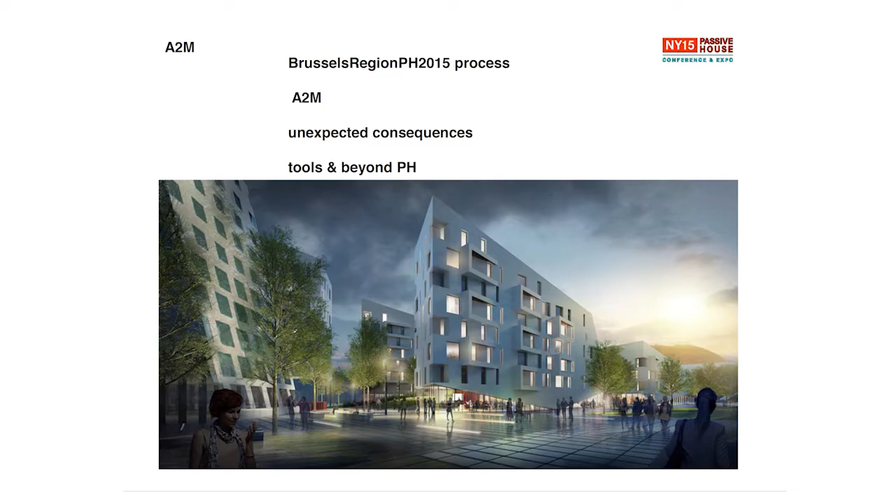I'm also teaching at university, so I'm going to show you some examples that the poor students have to live with. What I'm going to explain to you is how, briefly, in a region in our country, the main region, we achieved passive house now. It has become a mandatory law.

So since the beginning of this year, if you want to have a building permit, no matter if it is a new build or renovation, no matter the destination, you have to fulfill passive house. So if you don't want to do passive house, no problem, but then you have to leave the country. But it's okay. You will see how it happened, because it was an accident. It shouldn't have happened, but it happened.

And then how do we live in such a context as architects, because it's now normal. And then we are going to show you some unexpected consequences, some very, very cool. And also now that all is going to passive house, what's next? What are we doing now as architects? How can we redefine architecture?

And all that is environment and urbanism is regional. So we have a government, a president, and ministers, and they decide what to do locally. We don't have to follow a federal government. For construction, because I'm going to come back a few times on cost, our average construction or renovation cost is quite the same. It's 150 plus or minus dollars per square foot. If I compare with data I found on the internet, we have the same prices as in Arizona or something like that. So we are quite far from New York City.

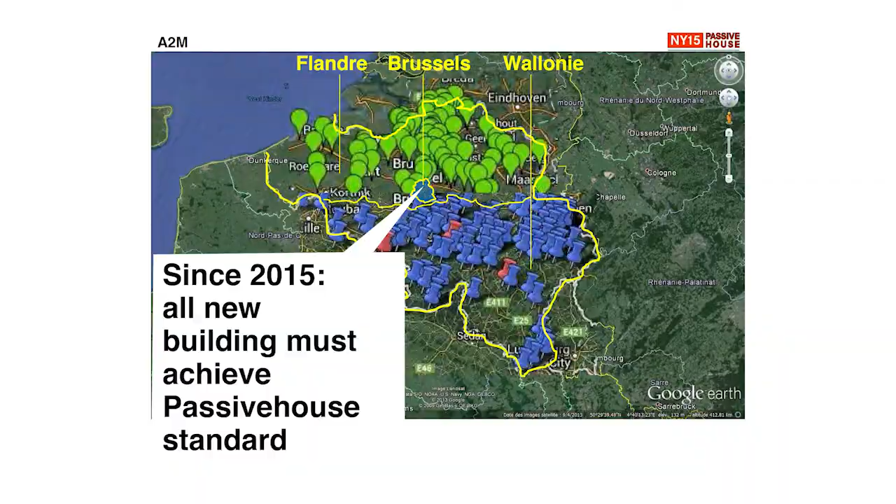Okay, this is our whole country, and the Brussels region is here in the middle. These are all certified passive houses from our local passive house platform. The law was voted by the government unanimously. We always have coalitions. It may look weird to you, but we mix all the parties. But the whole coalition voted the law of mandatory passive house, in 2011.

And one of the reasons they could vote that law, I shouldn't say that, of course, but it's thanks to ignorance, because they didn't know what we were talking about. Otherwise, no way they would have voted such a law. Of course not. But nevertheless, we achieved that. So here we see the president, the ministers are here, and one of the ministers, she's quite a nice woman, she's a friend now, she proposed that law and said, okay, why don't we go for mandatory?

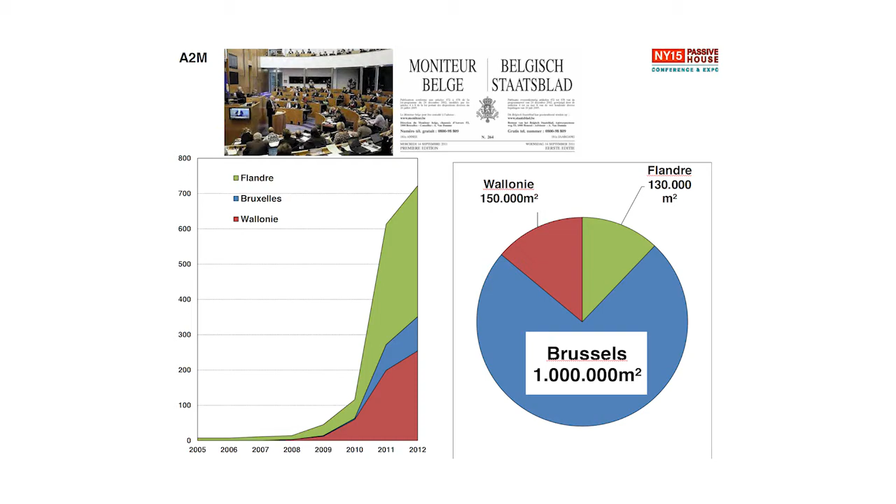But before doing that, they had a lot of questions at the parliament and so on. Is it possible? Did you make a feasibility study? Are you sure that we have the skill? Are architects able to do it? Contractors, whatever? And what's the extra cost, you know? And what they could always answer is we have done no feasibility study, no university study, nothing.

We just looked at our local stock of passive house buildings growing, and they just saw what we can learn from what people are doing now. So this is one of the key elements to achieve that policy: first they started to push the local stock of passive house. And I'm going to show you one of the actions they've done. And they had amazing success, because in only 4 or 5 years, we achieved 1 million square meters, that's 10 million square feet.

So the region we have here in blue, that's that policy, when they pushed passive house buildings. And the 2 other regions, which are bigger than our region, had another policy. It was, well, don't push too far, don't go too far, just give some help for putting in some solar panels, but just gadgets, okay. So we saw after a few years that it's not such a good policy, of course.

But having a third of the country go to Passive House is quite something. Of course, it's our scale, it's not as big as your scale. And the effect was immediately amazing. So we did a survey 2 years ago. It's been just adapted now, not only thanks to Passive House, but it's a general policy for renovation of the buildings, because it's also almost 70% of CO2 emission.

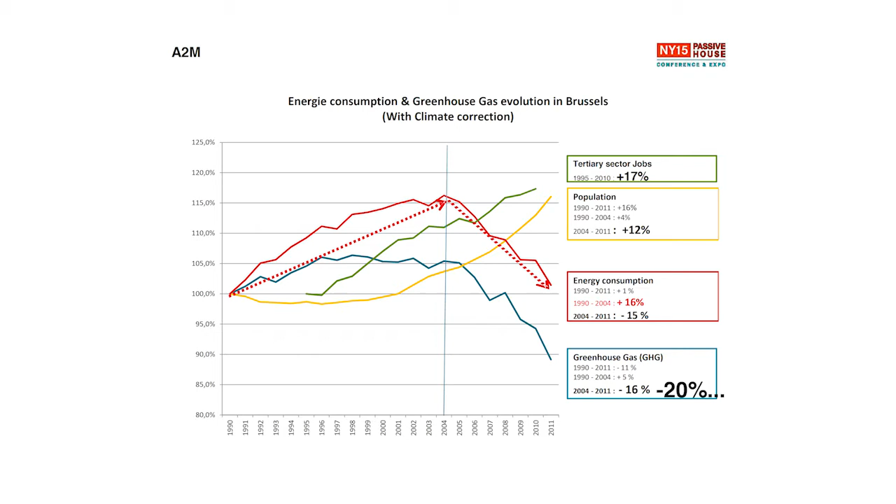We have already a drop of 20% CO2 emission compared to 1992. Not compared to 2010, as the G7 proposed last Monday, but it's already okay. So we were surprised. So it's possible to do it. Despite an increase of population, this is the growth of jobs thanks to these policies. So it was a surprise, not only for us, but also for the government.

So how did we get there? One of the actions they've done had an amazingly big effect with almost nothing to invest. It's what they call exemplary buildings. So the region, like, you would say, New York State proposes: who wants to have $110 per square meter, and I give you that, but you're going to have maximum $225,000. So if I ask you, would you like to have that? Everyone would say, of course, I want that money. But to have that money, you just have to go as far as you can. You don't have to fulfill Passive House, but just do what you can, and we will see.

So the first year, when they launched that program, they received a bit less than 100 proposals. And in those 100, we proposed a lot of projects. We forced our clients. A third of these projects were Passive House. That was in 2007. And year after year, during the crisis, 2008 and 2009, every year they were coming back. Who wants to have maximum $200 and something thousand? And the more the crisis was there, the more people were coming. Of course, I want that money.

But what happened? The second year, when they launched that policy, people looked back at last year: who was the winner? What did they do to have that money? And they said, oh, they did Passive House? Okay, now I'm going to do it, because if my neighbor had it, I want to have it also. And what was clever is when they proposed that, it was no matter the destination. You could be a private, a municipality, schools, a kindergarten, or a developer, a bank, whatever.

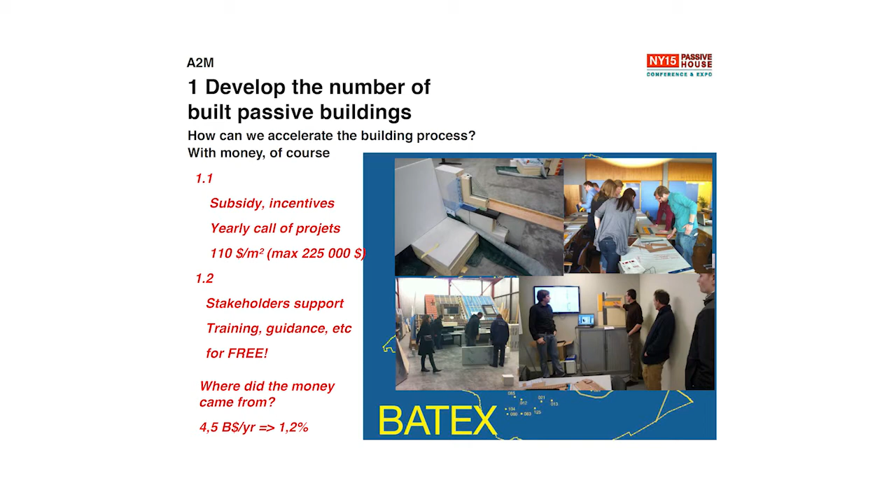But after doing that for 4 or 5 years, so from 2007 until 2011, we had already a local stock of a lot of kinds of destination buildings, retrofitting and so on, all Passive House, no EnerPHit, but 100% Passive House.

And there was already a lot of feedback. For example, one project out of two has a cost which is cheaper in Passive House than a normal building. That's not normal. And for architectural design, there could be very crazy forms and so on. So it was a surprise.

So of course, the parliament asked: but normally Passive House should be an extra cost of 10, 20%. And then the minister said, yes, you're right, but here, look, in our local stock, look what we have. Half of them are done with a lower price than classical, etc., etc. But of course, when the law was voted, because no one understood anything, it was published. We have a king, so it's a king's law, whatever, okay?

But after, all the lobbies, all the stakeholders, real estate, contractors, Code Institute, architects, federation, engineers, they all went crazy. When I say crazy, my God, it was like war. So they all came back to the minister. You're crazy. There's going to be a strike on the street. We are in a deep crisis. Then we're going to abandon your country. And then the minister: okay, you want to abandon? Ciao. Well, she was, my God. I also thought she was crazy, but okay.

But it worked. What happened in 2011 when they received all the complaints and everything, we proposed to all the stakeholders: okay, look, we have 4 years before the law starts. What should we increase? Where should we work together? So we set up hundreds of trainings, support and help sector by sector for real estate developers, plumbing companies, craftsmen, all together. And that helps. And at the end of 1 year of hard discussion, I can tell you, we all signed together what we called the Passive House 2015 Pact.

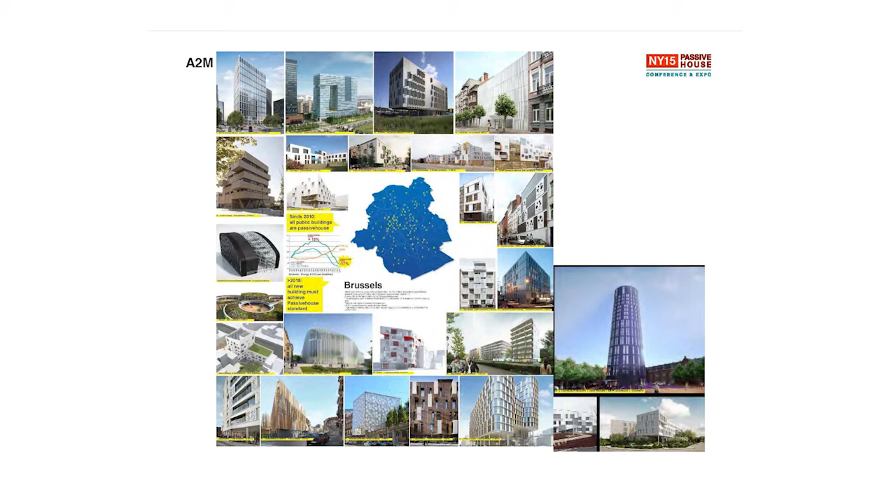And it had an enormous effect, those exemplary buildings, because we saw all kinds of projects arriving with any kind of design, but all fulfilling Passive House just to get that incentive. Now, of course, because it's the law, Passive House is normal now, so they could stop all the incentives, and this money now goes to social.

That's not bad. But what is a good sign is that the government itself, for their own building, the environmental administration, their own building is also a Passive House. It doesn't look like a Passive House, but okay, it's Passive House. Even the energy provider, his own headquarters is Passive House. Of course, he's not stupid.

But what happened last year, in September, we had a new election, a new government, a new coalition. Of course, the former minister, she's fantastic, but she was not re-elected. There's a new one. Thomas, you met her. She's okay, the new one. She understands nothing, but she accepted. And they said, okay, we're going to keep the law. We don't change it. We will see.

And what happened during the few months before the 1st of January this year: all the lobbies went back, even the ones who signed the pact, of course. What do you think? So they came back and said, oh, Madame la Ministre, you should remove the law. It's going to be hell, etc., etc. So it was crazy, forget it, I don't know what.

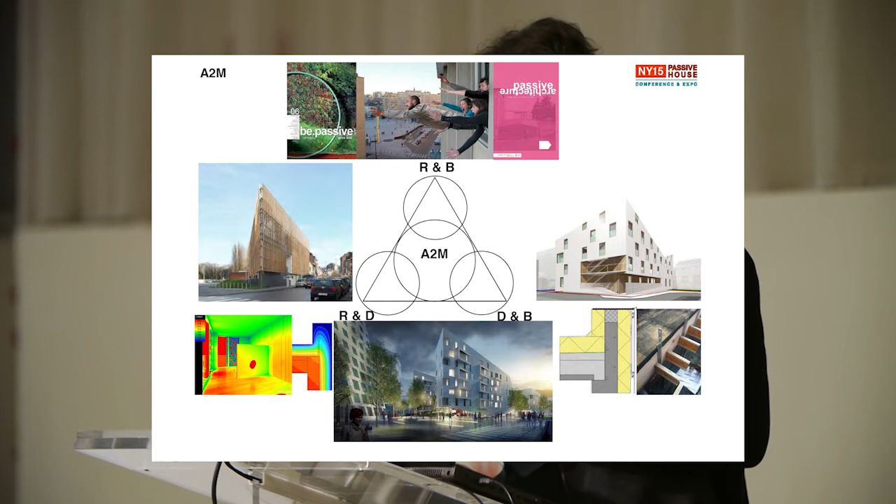But we have put a lot of effort, while I was also president of the Passive House platform, into communication. So we did a lot just for free, for fun, of course. So we set up that magazine. It's called Be Passive. It was given to all architects. It's a quarterly magazine. We stopped in September. Now we launch a book that explains all that. So Ken has some copies of that book, French, English, and Flemish, always 3 languages. Crazy. So now we do communication in our company ourselves, magazines, all that.

Research and development was done in the Passive House platforms. Now we reintegrated that, and I'm going to come back to that. So now we build not only in Belgium, but we're doing the Belgian embassy. It's a crazy story. In Central Africa, it's in Congo. Of course, Passive House. In Côte d'Ivoire, we have another condominium. And very recently, there is a project here in Meatpacking, and maybe a second in Newark, we will see. But apart from that, we do a lot of conferences, training, masterclasses, even in Shanghai, on Passive House.

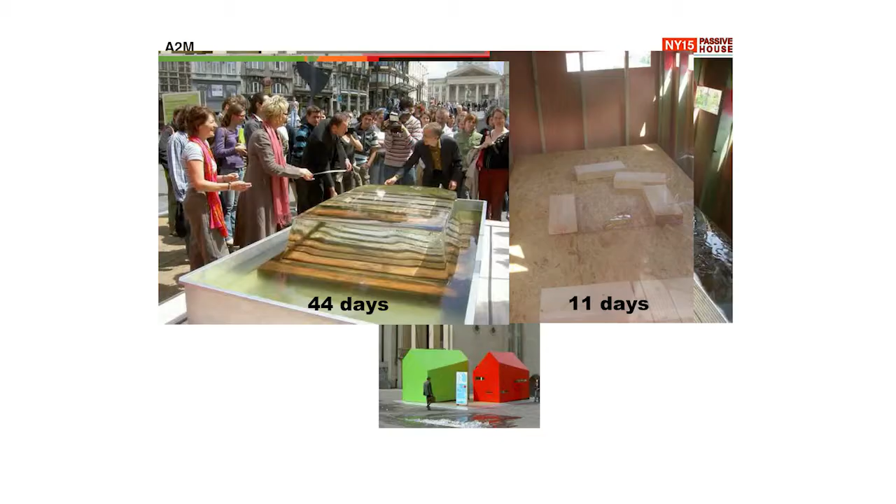What we discovered was a surprise even for us - it worked, half the ice was still there. So you see, insulation works. People received it well, so it was working.

The year after, we did it again but in winter, with heating inside, and people could see live how much energy you are saving or not.

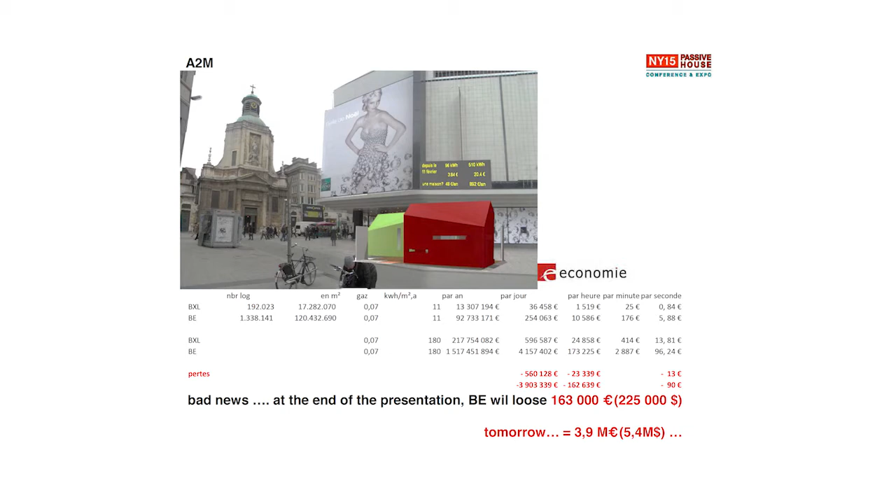What's funny is, regarding that calculation, in the hour when I'll be finished, my country is going to lose about $225,000 because the buildings are not Passive House.

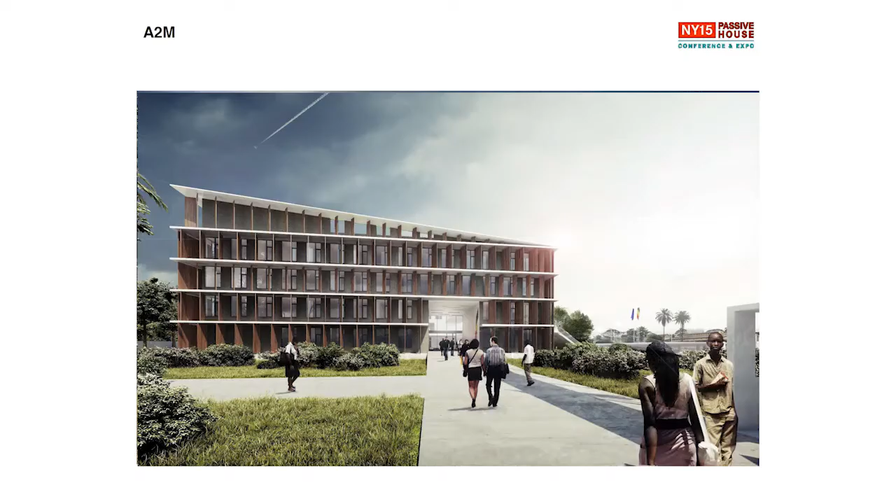So we won a competition for the Belgian embassy in Congo, Kinshasa. But it was trickier to make bulletproof, Kalashnikov-resistant buildings than passive house ones. Now it's under construction, so we're insulating it and everything.

We proposed to the government: look, you should do a passive house even in a tropical country, because if I take the Köppen climate classification, Belgium - I don't know why - has a small concession in South Antarctica, which is also a polar station, a passive house polar station, one of the coldest places on Earth.

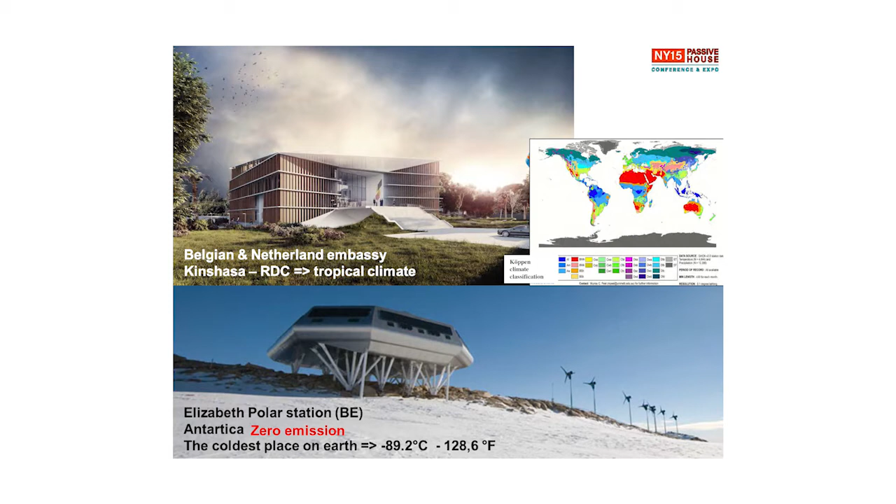So we told the government, look, if we already have a passive house in the coldest place on Earth, let's do it in the hot climate too, which is not only hot but also has mainly 100% air humidity.

But that's not why we won, of course - it's because of the price again. This project, as I said, is under construction for a cost of about $12 million.

What was a surprise - so this is us, this is the passive house. There were other companies, other competitors, who proposed normal buildings or low energy buildings for $25 million, twice the price. So we were wondering what's wrong with them, or what's wrong with us, I don't know.

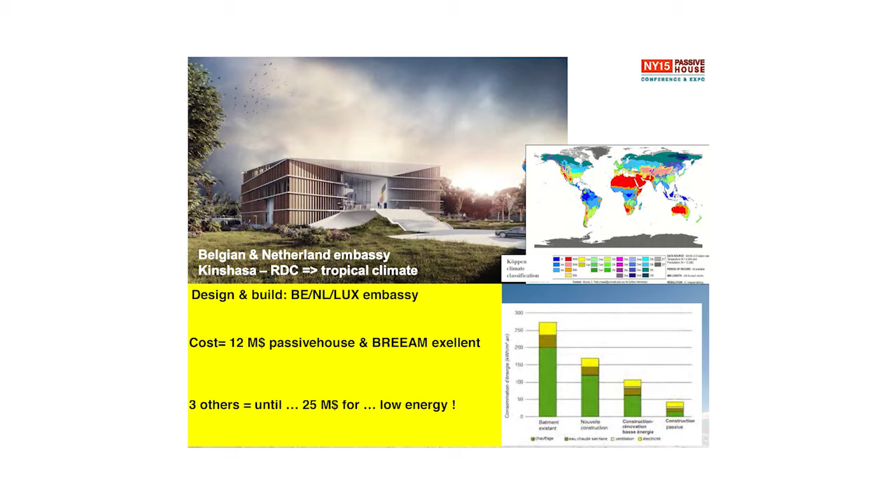But this is the real reason we won. Now they communicate on it, saying look, we are here and here, but that's fun.

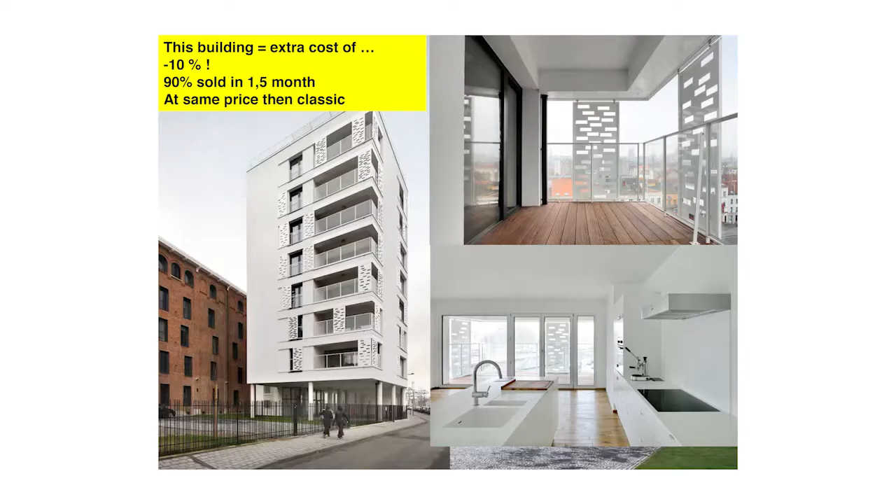Another example we had for a developer, coming back to that brewery renovation and retrofit. We made a small building here. And because it was a passive house, again, it's a catastrophe for us because it's been done at a cost of 90% compared to classic.

They sold everything in 1.5 months, and they sold it for the same cost as a classical building. So we asked the developer, are you crazy? Why did you sell all these apartments at the cost of a normal one? It's a passive house, in a nice location on the river. He said, look, it cost me 10% cheaper, why should I sell it for more? And this is what is happening now. It's become normal. All the market is calming down, and this is really nice.

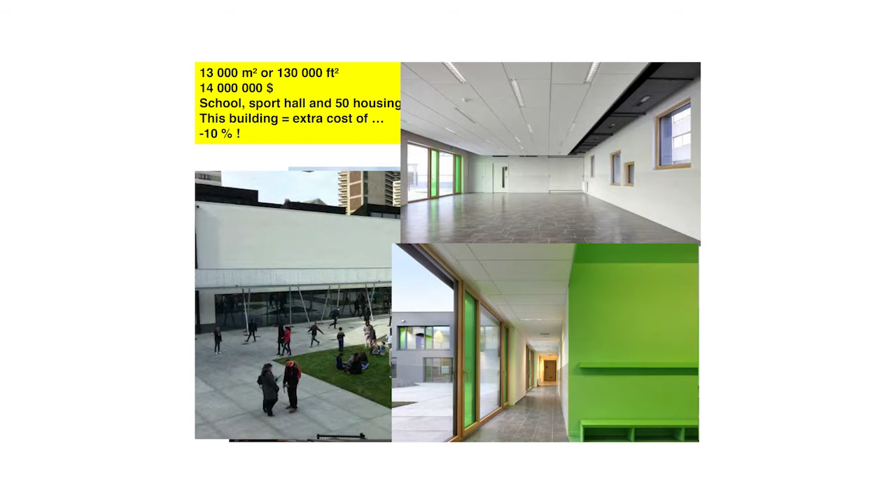This is where we are just delivering this one now. It's a big project, 130,000 square feet, housing and school. The school and housing were just delivered, the school about 3 months ago. There's a kindergarten, a sport hall, primary school, and so on. It was also a call for tender with builders together with architects and engineers.

So we made a lot of funny and funky design, everything at normal good prices. We also play with colors and so on. It doesn't look like a passive house, no one knows that. The director knows because he can have a bill of almost nothing. We played with color, it was very fun to make all blue, green here and there.

Here were all the entries, there were 17 entries. At that time, they didn't ask for passive house, they just asked for a school and housing, 50 housing units. So that's the total block. It was again a surprise for us, we were here, so we are here anyway. We were not only the cheapest, or our contractor, but among the 4 passive house projects, also the cheapest. So we were wondering what's wrong with all these guys.

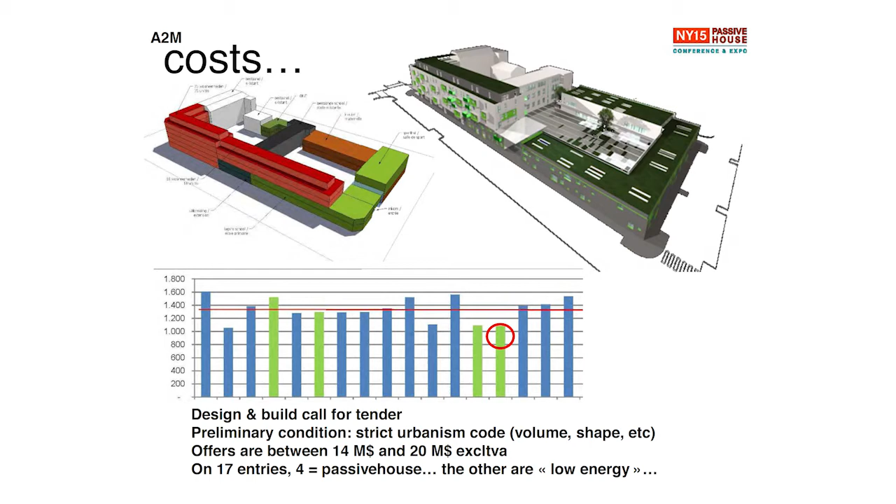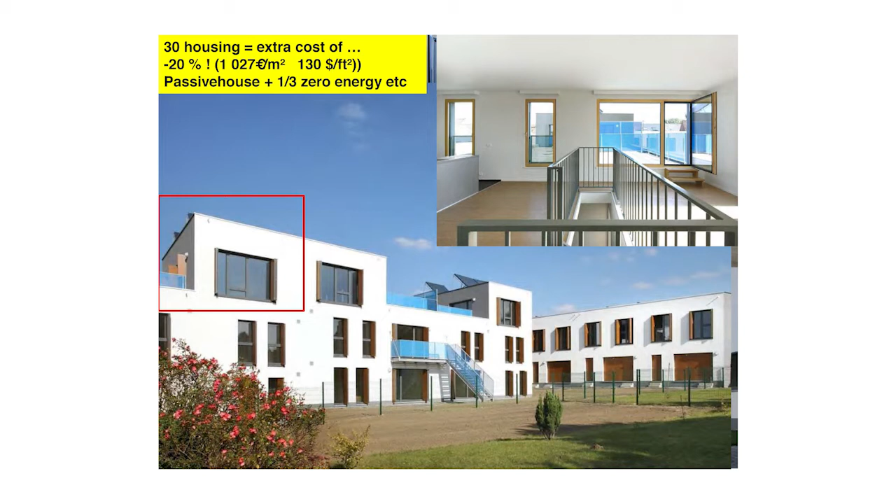After this happened a few times, we did a lot of studies on where the costs are going. How come some are so cheap in passive house, and how come sometimes you have double the price? Here's the same, it's like social housing, also not only passive house, it's more, it's close to zero. And it's really now becoming normal for everyone.

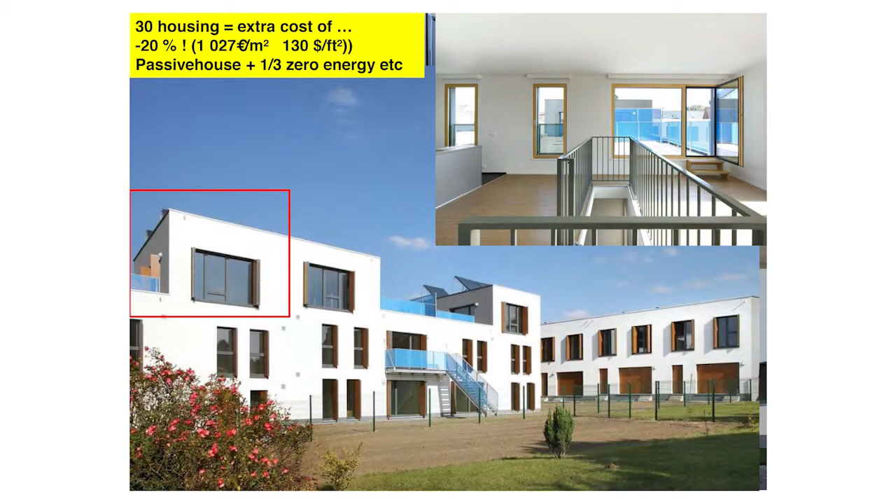We had a lot of questions about how people behave in this building. So here I'm open, thanks to online monitoring. We have a lot of monitoring ourselves that we download because it's easy to control and see how it's working. I'm wondering if... okay, I'm going to show you something live. I hope it's working, if internet is working. Oh yeah, it's okay, so I'm going to take the apartment above.

So it's one of these 30 apartments, you can see here we have a survey. Here is all the temperature since a year. We finished this condominium a year ago. And when you see the temperature, it's between 22 and 25. And this morning, or now, live, we are June 11, you can see it's quite okay temperature, yeah, a bit hot yesterday.

I'm sad for them, maybe they leave everything open, they didn't put the sun blinds. They are there, but they're free, they do what they want. And now it's evening in Brussels, 6 hours more, it's like 24 degrees. So this is to show, if people would still ask if that is working, of course.

So it's this building, again, we also test how it requires to go to zero energy, complete zero energy on the bill, not zero impact, zero CO2, whatever, no, zero on the bill. If I had to explain that to my grandmother, she would say zero is when I pay nothing, of course, no matter how the physics is behind it.

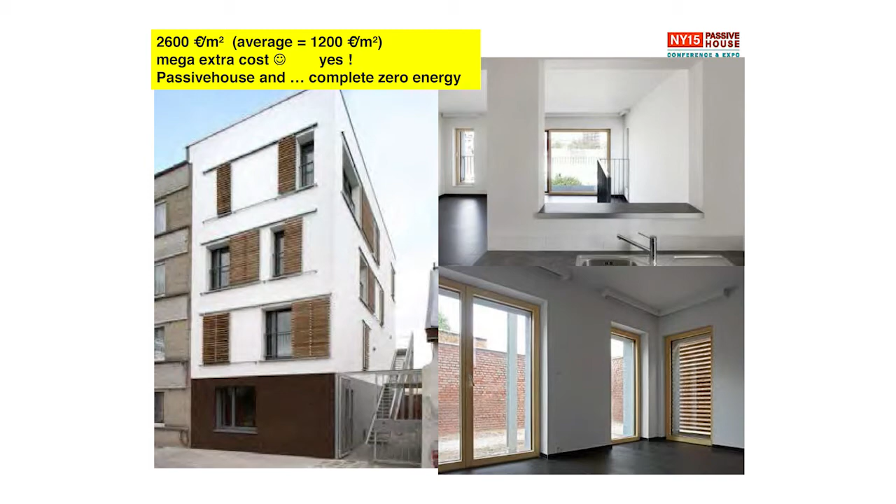So here we did social housing, it's classical passive house, and we filled all the roofs with PVs, photovoltaic, etc. And there, at least, we had an extra cost, almost double the price. That was fantastic for us, cool, we could have a bit of money, it was time. But the extra cost came from the zero energy.

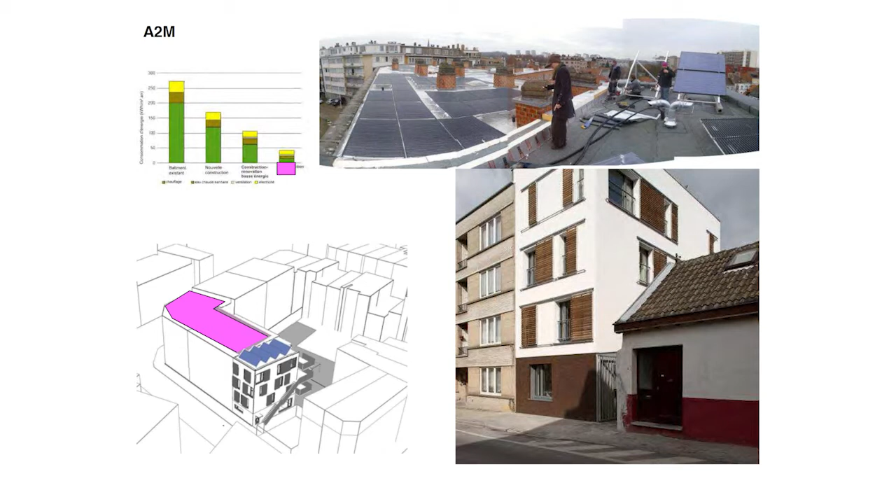But what was funny is this is a passive house. Sometimes people say, come on, I'm doing a low energy, it's already something. For us, when you do something else than passive house, you are very courageous because you mortgage your investment, because you cannot evaluate it in the future. With a passive house, you have a chance to go to a positive building or zero, but if it's not, it's difficult. So here, despite this passive house, we had to use the neighbor's roof to compensate all the energy.

But it's possible, we did it. So this one here, we are on the roof and we use the roof of the neighbor, that's light photovoltaic panels. We paint his roof in white. It's the same owner, social housing, but then we calculate if we would have done not a passive house, but a low energy, which is already okay, no?

What does it ask to go to zero energy? Then we should have fulfilled all the block, but the problem is the owner only owns that one. So this is, well for us, a proof that if you don't do passive house, my God, you drop the money. It's stupid, because you have to re-renovate it within 10, 15, 20 years, I don't know.

So now even for real estate, this is almost over, since we integrated all the building physics, thermic dynamic simulation and everything in our office, so all our architects are doing that, just like normal, like drawings, whatever.

It becomes very cool to make passive house because, of course, this is not a clever way to do passive house because it's not very compact, it's not well orientated, but I prefer to do the building there because you have to put a better orientation, I have to put it on the street, but that's not allowed, okay? So orientation, it's nice, it's funny, but in real life, what do you think?

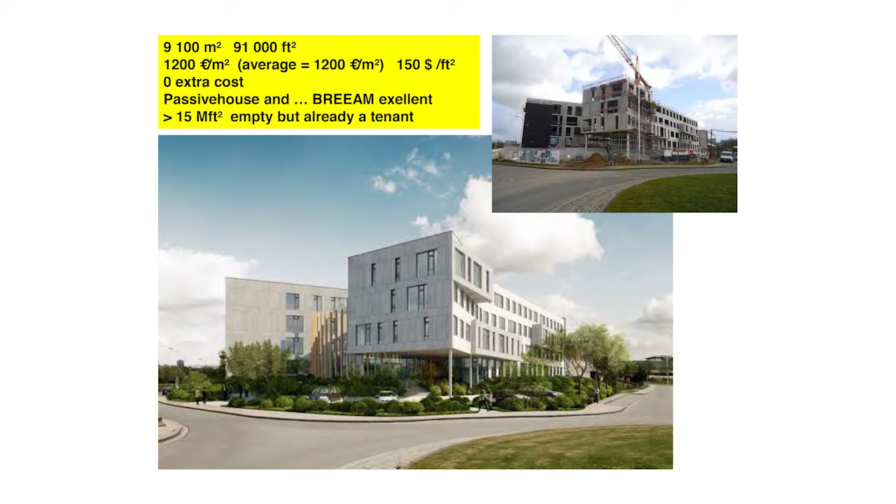And this is one of the main big real estate companies in Belgium we have, so they're not really funky. They say, look, you do what you want, I don't care. It has to be at the same cost than the normal one, and it has to support any kind of users inside. Okay, so here we have an extra cost of zero.

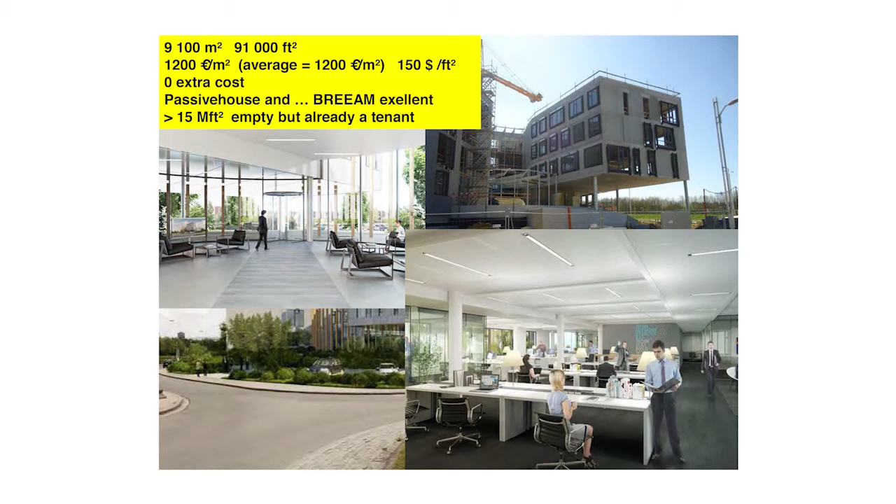So it's under construction, it's almost over. And they already have a tenant, and that's funny because in that neighborhood, there is more than 15 million square feet empty because of the end of the crisis in real estate. This one has been completely rented straight away.

That's very funny. Also in wood construction, of course, as everyone. This is the last one, we just want that you put on the invitation. It's a big district, and we are on the south of Belgium.

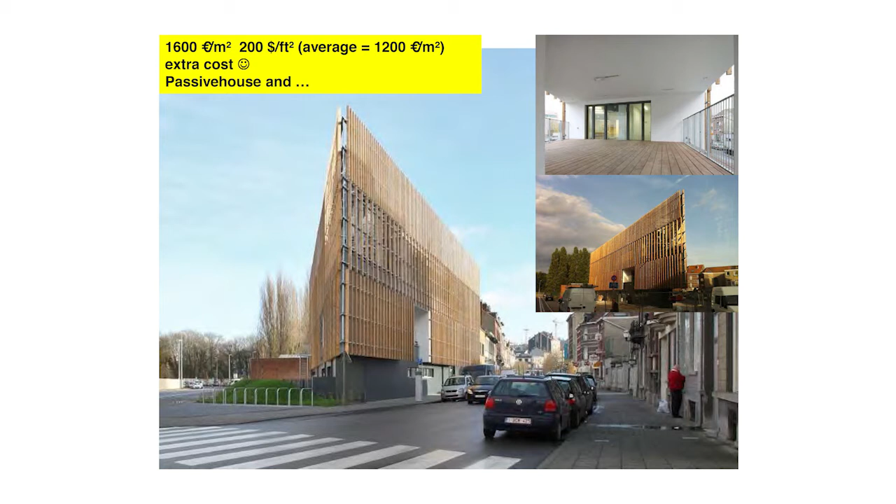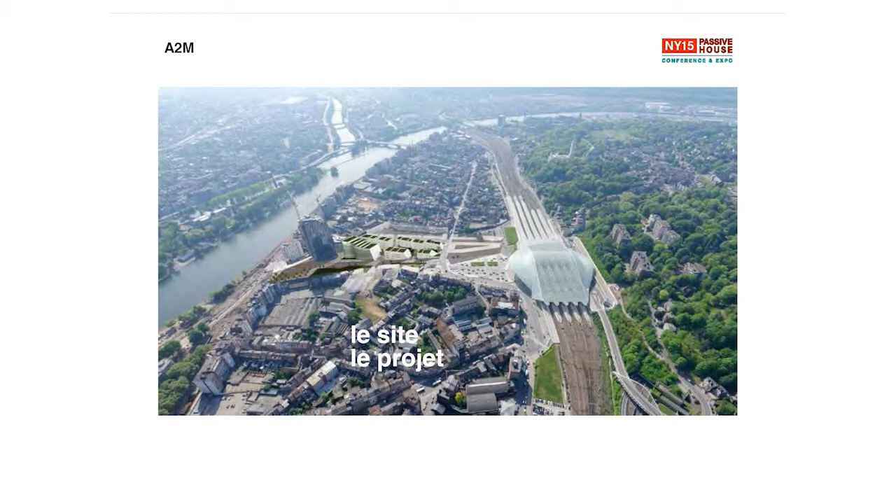And there was a kind of, I just showed that to show how we do conception. It's not passive house, but there was a kind of pressure in that competition because we were surrounded by megastars like Madonna, Lady Gaga, but for architects - Calatrava, OMA, Rudy Ricciotti, Ron Arad. So they were super megastars. So we are here between Calatrava, but it was okay because he already had 500% extra cost.

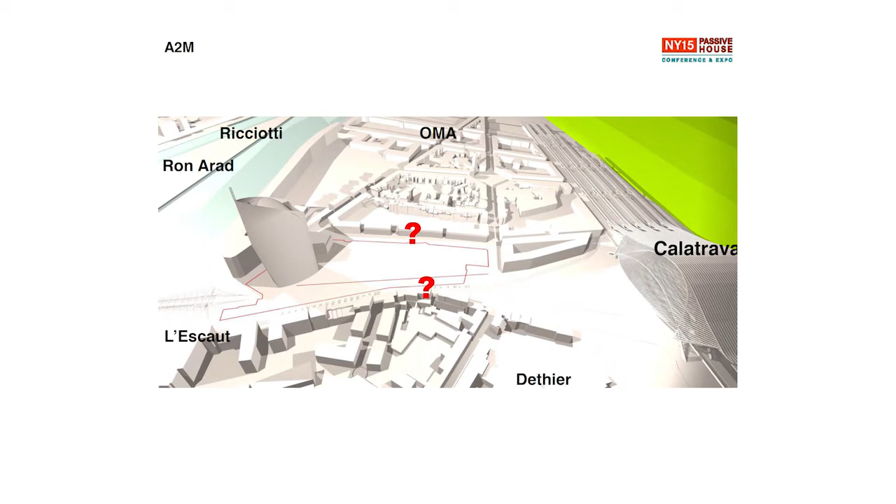But it's cool, huh? It's cool. But the developer and the region and the municipality and everything said no extra cost, zero, of course. It's, of course, you know, our daily bread, don't worry. But we have the river here and so on.

So we did the competition, and 2-3 weeks before we ended the entry, we learned, my God, there is Jean Nouvel, who is one of the competitors. So I said, okay, we're dead. Are you saying Jean Nouvel? Okay, so this is what they ask.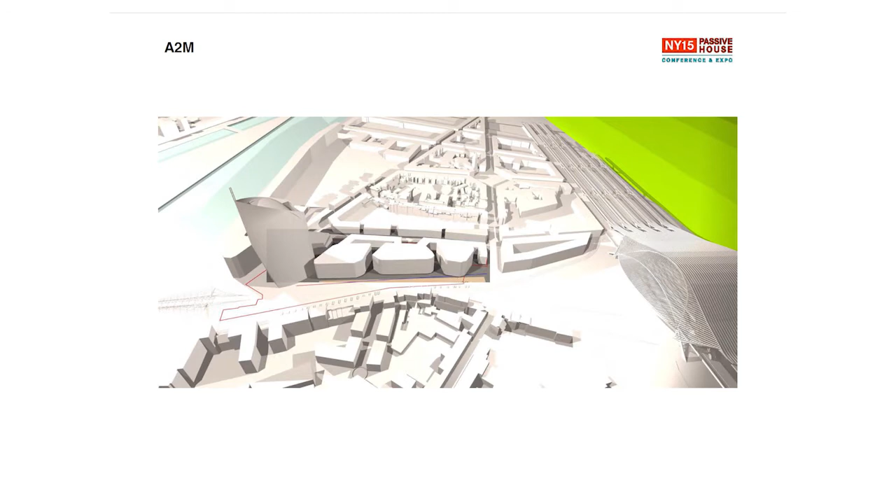And instead of just adding a more extra design, whatever kind of Frank Gehry design, whatever, I don't know, we just worked by combination of information. For example, you have two main streets. The hill is here, we bring the hill down to the river. Then we put a kind of raster connected to the two main axes.

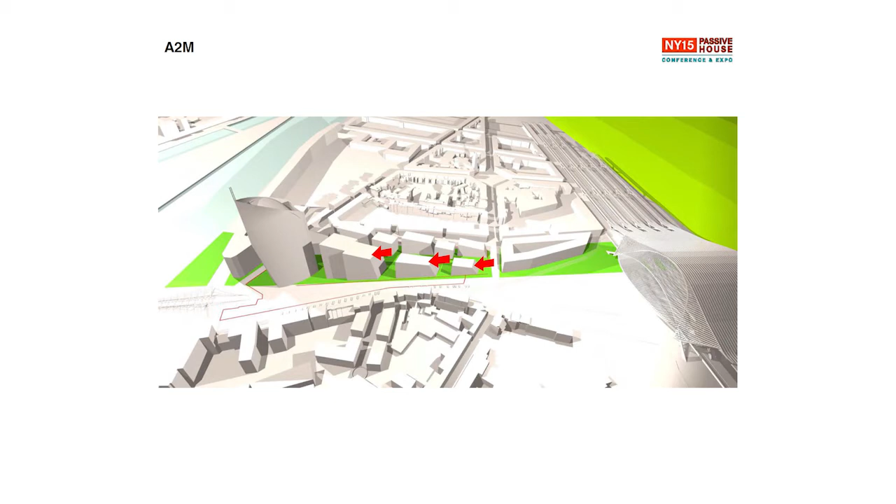Then we do like in puzzles. All the plots, we rise them up and link them to the existing location. And then we move them a bit, like a sequential, I would say that. And that gives this kind of movement. And it's a mix of housing, shops, offices, garden on the roof, shared gardens inside, outside.

And this city is called, the city is Liège, it's called the City of the Thousand Churches. These are all the modern ones, the Calatrava, some very famous buildings. So we introduce a kind of new typology district on that zone.

So it's this one here now. We play with the ground. When you lift it up underneath, you can put shops and so on. All, of course, passive house, what do you think? So it's that way, these are small hills inside. And all that done at the cost of a classical building also.

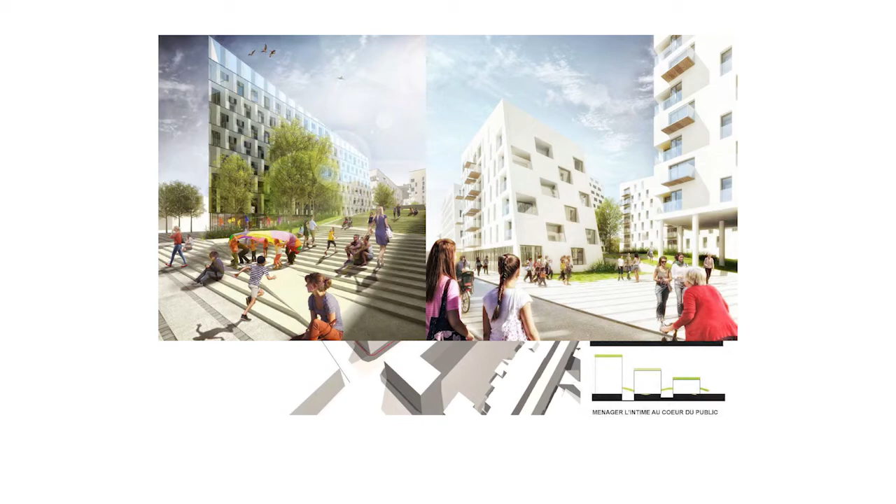I'm going to go a bit farther. So this is just to show also with public places, etc. So it's an investment of almost $600 million.

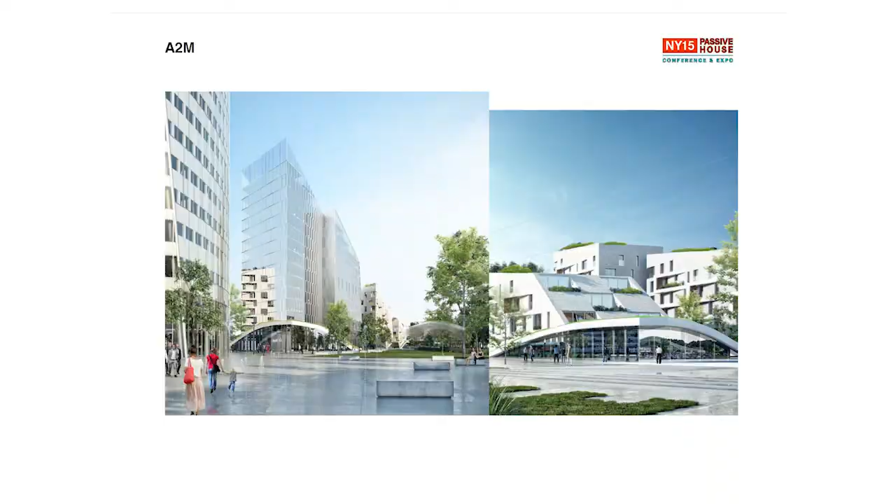Unfortunately, we couldn't make extra cost. That's too bad. So the unexpected consequences. When people say, even now, and I agree totally, when people say that passive house costs a lot, they are right. We even have a project that cost 200%. It's not the 5, 10%, 200%. It was cool for us.

So they are right. And when people say, come on, passive house costs nothing, it's okay. They are right too. It all depends which are the factors that drive you to the right or to the left. That's all. We did, as I said, a lot of studies on where the costs are going. So these are construction costs of classical buildings, and here is the construction cost of passive house buildings. This is the one we have here. It's one of the cheapest ones.

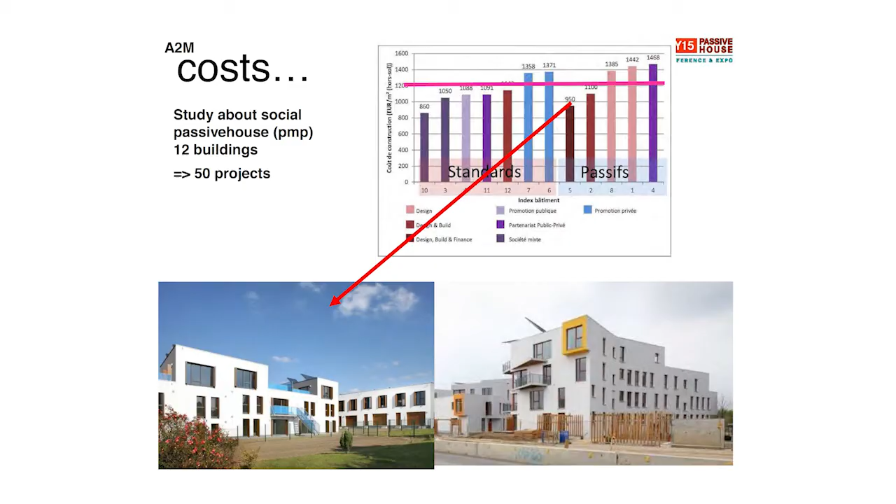What we saw in all of the studies, I just show you one of the consequences that the minister used a lot, is the influence factors, the extra cost influence factors. There are some, like in classical buildings, passive house also. But we saw that in these 50 projects we studied in detail, 11% of the extra cost was due to a better envelope, airtightness and maybe triple glazing, not always, but sometimes, okay, and big insulation.

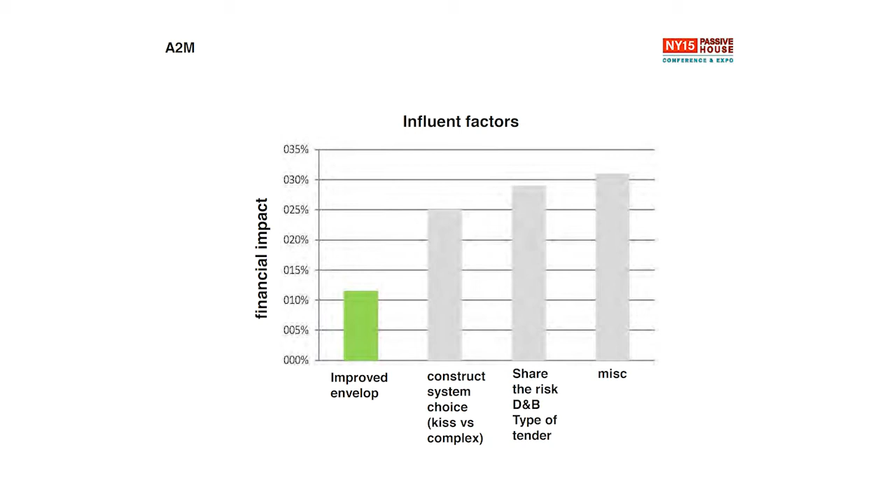Okay, that's right. What we saw also is that 25% of the extra cost was due to the way you choose your construction system. For example, we are in a country where people used to work with concrete, so I'm not going to ask them to do wood. Every time we asked them to construct in wood, we had crazy extra cost. And on the contrary, you have another region where they do just wood. If I ask them to use bricks, my God, they're going to have just extra cost.

So I'm sorry, there's no surprise, but if you ask local contractors to do something else, of course you're going to have extra cost, but this has more influence than just the envelope. So when you have a building that costs less than classic in passive house, it's just because people are more clever in the way of construction.

Another thing we discovered that has a 29% influence in all these projects is whether you share the risk or not. For example, if you do a design and build, you give an entry together with a contractor, so you're going to design your project together with a contractor the way he works, which is a special way to work, and it's going to be maybe different than another. This is completely different than when you work as an architect alone and you ask prices.

I shouldn't say that, but normally when we ask prices as architects, all the contractors answer for what we have designed. Sometimes they answer, what the hell has he designed? But okay. And sometimes they are okay, but they just give a price for what we did. And sometimes it's not exactly the way they would have done it. But when we work together, that has more influence. And this is when all the extra situation, pollution, whatever.

So it means when you have a building that costs less at the end in passive house, it's just because the structure is better, or we work together with local skills, local manufacturers, and that's the way they do. This has more influence than the small extra cost of the passive house. That's the only way. And when people say passive house is difficult, they are right too. It's hyper tricky. And some people say passive house is nothing, piece of cake. They're right too.

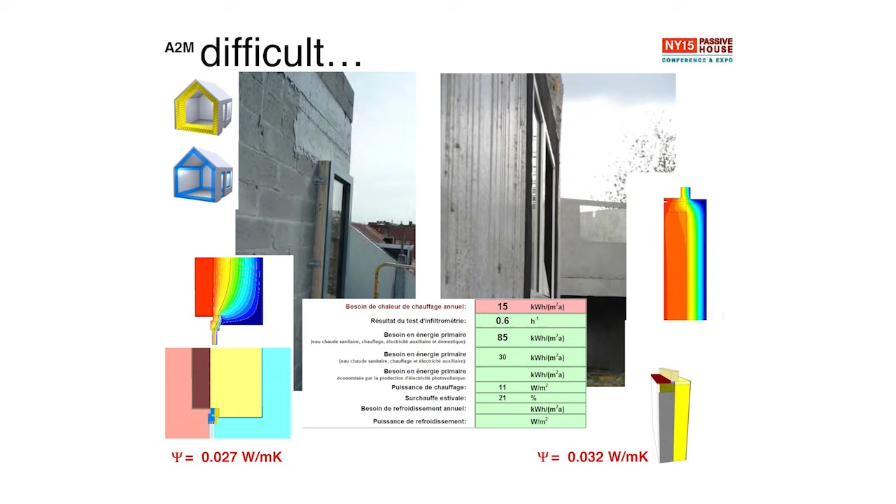Another solution here: in that building we had crazy extra cost, which was partly for our bill. We did a lot of connections here through the insulation and so on. So years ago we did that crazy work for the craftsman here. It was the best day of his life. He received a lot of money. Because the purpose was to avoid heat going from inside to the outside, of course.

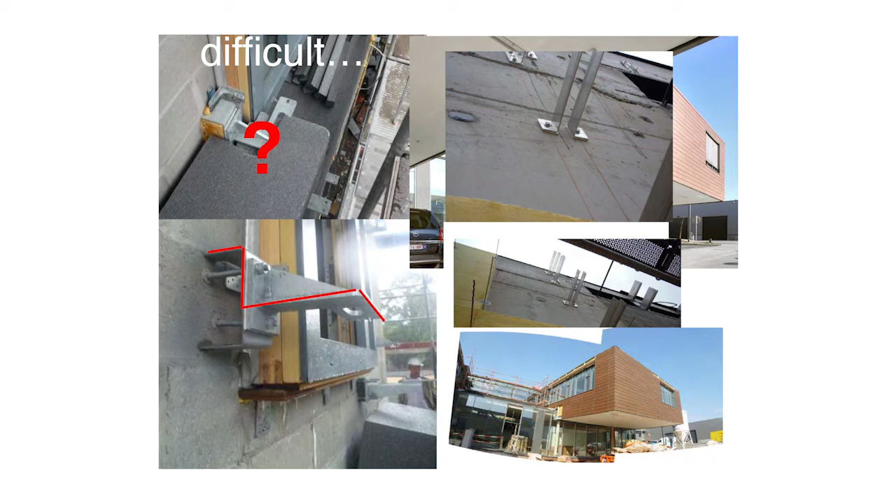So when we simulated all that in calculation, we discovered that the heat is going there, going down, outside here, so it's crazy. And this is crazy when you have to do that. So I totally agree. We did it. It's crazy. I even wonder how our contractors could do it, my God.

And in all those things, the only really impactful element, you know what it is? It's that small, white, tiny thing. It's PEHD. It's like a small plate of thermal bridge stop, which is nothing. Small plastic, high density. And in that project, which is bigger than this one, that's one part of the building. We have 2,000 thermal bridges like that. So you think we're going to make 2,000 connections like that?

No way. So we just took this small element, we put it in an existing construction system, nothing new. And the contractors put it here, that white element. They didn't even know it was a passive house. They knew nothing. It's a normal building. And they just thought maybe the architect is crazy, asking us to put those white plates, could be chocolate plates, whatever. Okay, so they did it. And here there was no extra cost. We couldn't, because otherwise we would not have had the project.

So now, retrofitting. We are starting now. It takes a long time, my God. We should be already running, but okay. Here, we are doing a project together with Michel Penneman, who's here, and Julie Moscovitch. Julie Moscovitch made a fantastic book. It's not only passive house, but high design. And she herself is doing very nice, very elegant design houses.

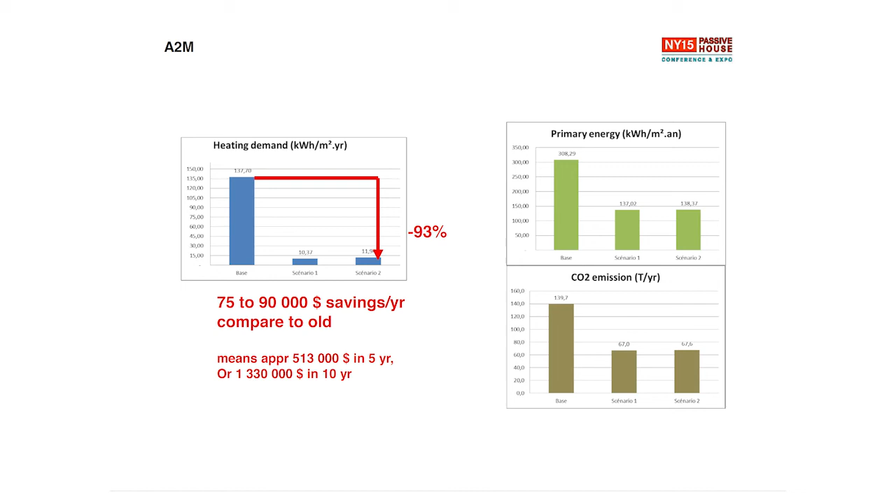So we made a calculation of how to make it passive house. We showed them that before and after it's going to look the same, just the bill is going to be different, because you cannot touch the outside, of course. But we're going to insulate everything from the inside. So we made a preliminary calculation of how much savings we're going to have, which is very easy here, because all is by electricity. So it's almost $100,000 a year savings. So of course they said, straight away I go for it. Of course, what do you think? But how are we going to do it?

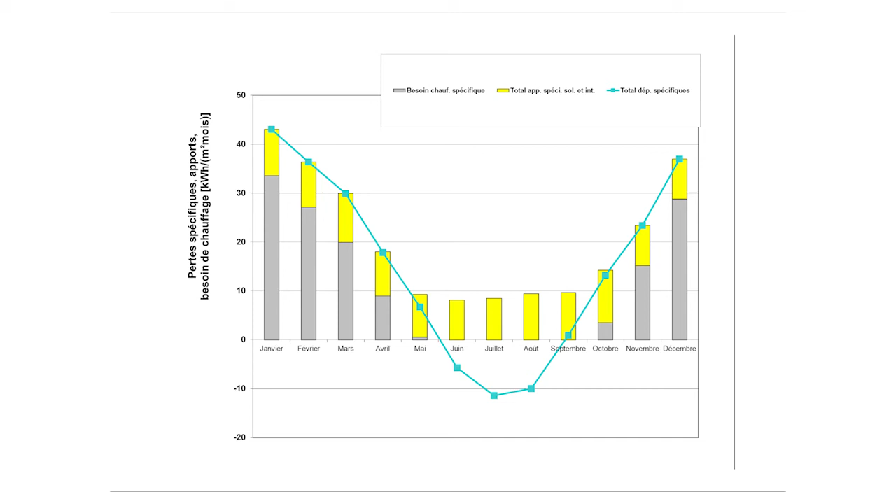So this is before and after, heating demand, cooling. This is the way we work when we do renovation. It's always a study done step by step, from the existing situation to passive house, to zero. Of course, if you do insulation with double glazing, you're going to reduce the heating demand. And if on top of that I put big insulation on the roof, I continue reducing. And if I put triple pane, for example, I reduce more, etc. And if I continue, the back facade insulation, etc. So that's the limit, low energy, and this is 15 kilowatt-hours for the passive house.

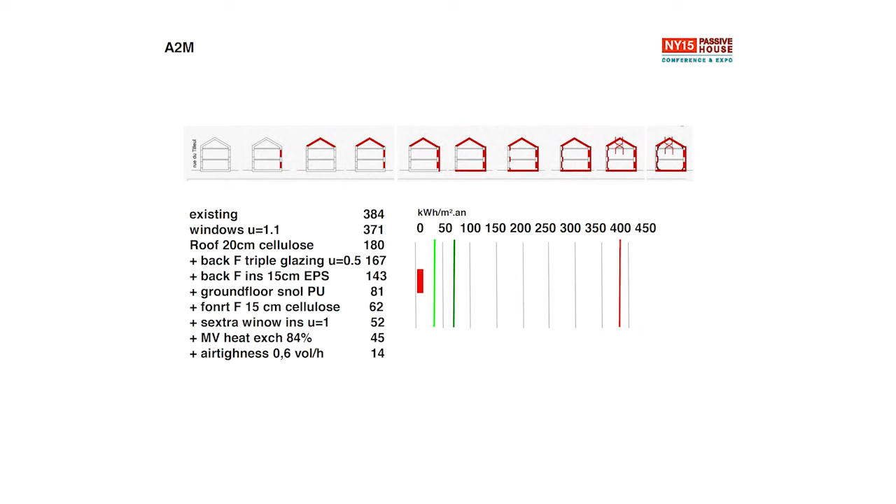So if I put insulation on the basement, and in the front facade from the inside we're going to put huge insulation and a new window, an extra window from the inside that you cannot see from the outside, so the outside stays the same. And then just add the mechanical ventilation, air tightness, and that's it. The job is done. It's passive house.

So we say to people, if you don't want to go to passive house, we go because we're a bit extremist. Well, everyone has to in our country, but if you don't want, no problem. You can stop before. The thing is to stop mortgaging existing buildings. So if you transform an element, transform it so that it allows you in the future, if you continue within 10 years, 20 years, to go to passive house and then to go to zero.

So you stop where you want, for the moment that you change one element, you're not going to change it anymore. So we did it for this building. It's a completely new building, renovation of an office building in the centrum of Brussels. This one we just started the work.

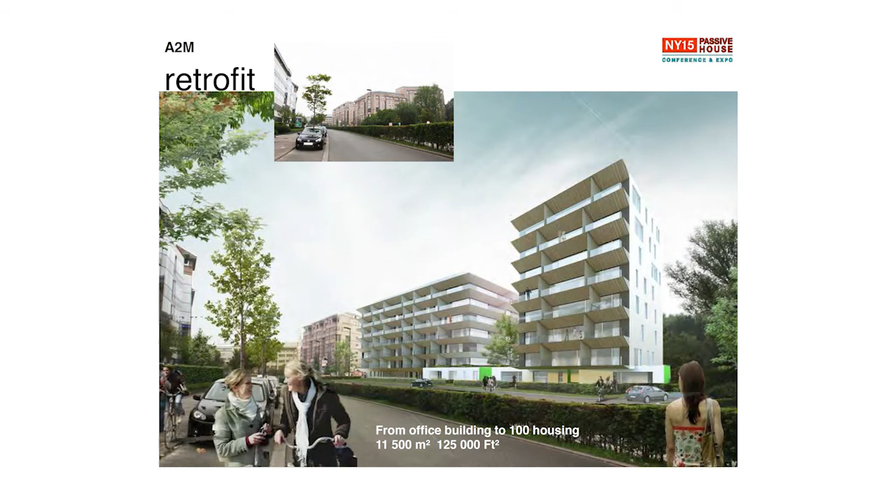It's social housing, a small high-rise. We just finished. It's going to be also a kindergarten downstairs. There are 2 buildings. We just finished the demolition, so we're going to add now. This is from Austria, but we're going to put a new skin from the outside. It's under construction. Office buildings, these are going to be renovated into 100 dwellings. We just started the demolition last month, so it's very new also.

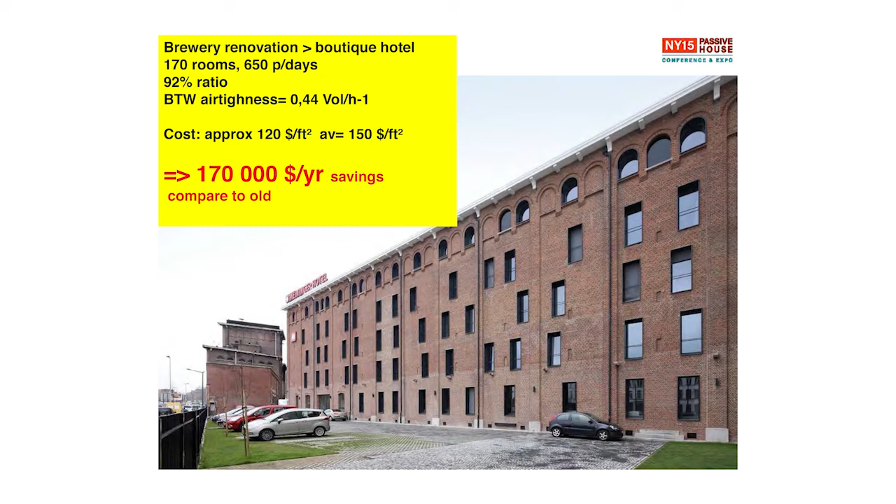And we did it also on a large scale, that's an industrial building, also in a landmark area in downtown Brussels, next to the river. It's a hotel. There are more than 600 people sleeping there every night, and it's a surprise. It's the one that has the highest occupancy ratio. It's 92% occupancy. Average is 63 in our country. Here it's 92. It's for a German company. It's called Meininger. They are from Berlin.

But they did a new passive house. It was funny. They're from Berlin. But we proposed to them, look, we do only passive house. But if you don't want, take another architect. So, okay, go, I don't care. But we had to do it for, again, a cost cheaper than classic. It's really annoying, but okay, we did it. But, you know, they go for it because they saw, oh, we can have almost $170,000 savings. Of course we go. What do you think?

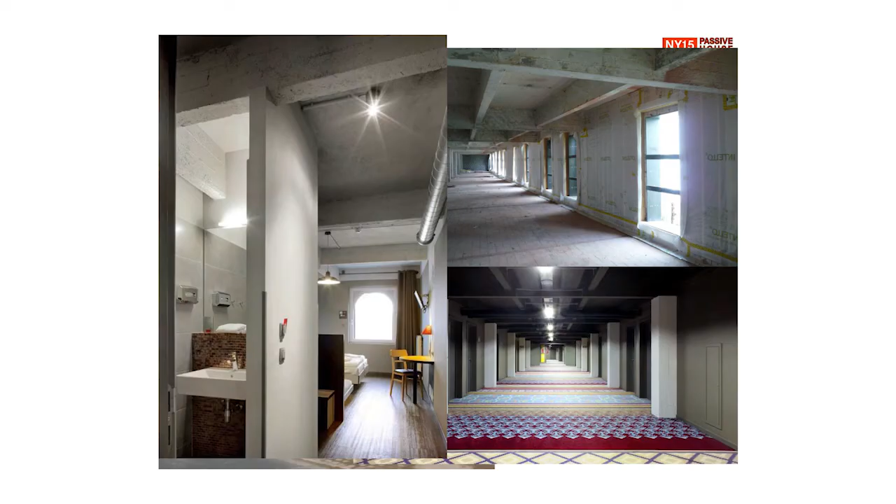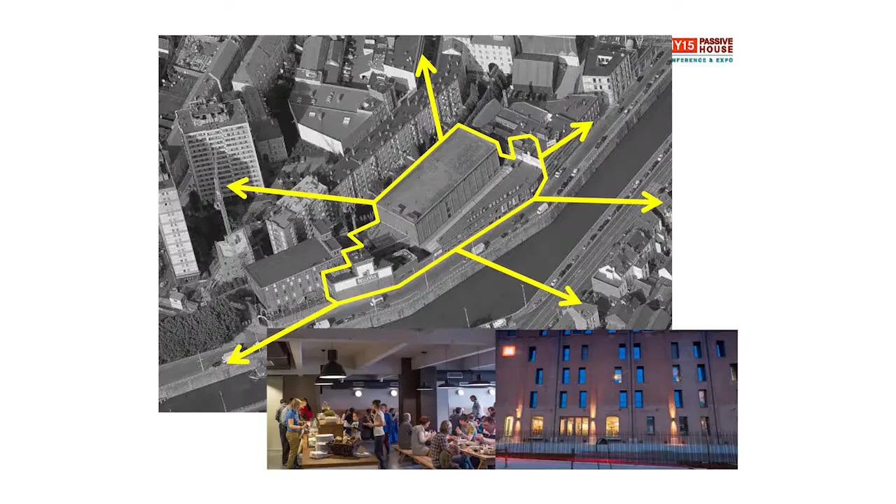So we renovated also from the inside, which is a bit more complicated. You need also extra tools, WUFI, whatever. But now it's done, and it's also a boutique hotel. So, and it has an enormous impact on the neighborhood. And we are now finishing a small study here for a project in Newark, a renovation on the other side of the river here. We will see.

That's the existing building. We change it, we lift up the corner, and we transform it all into passive house, of course. And it's hotel, retail, and whatever. And when you lift that up, you can go inside, come in here, and go on the roof, just a phantasm. But of course, it's also a passive house, of course.

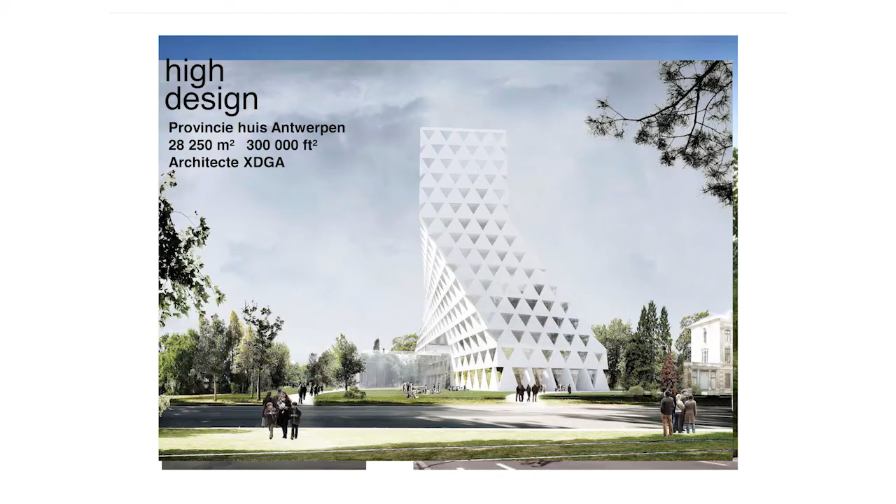And what we saw also in design, there were a lot of questions from architects, very famous architects who work in our country, like stars from a bit everywhere, OMA, etc. And they ask, yeah, but can we do high design? Can we? So this is, for example, a project under construction now from De Geyter. He came from OMA. No, we don't see them here. Yeah, hold on. I'm just going to show.

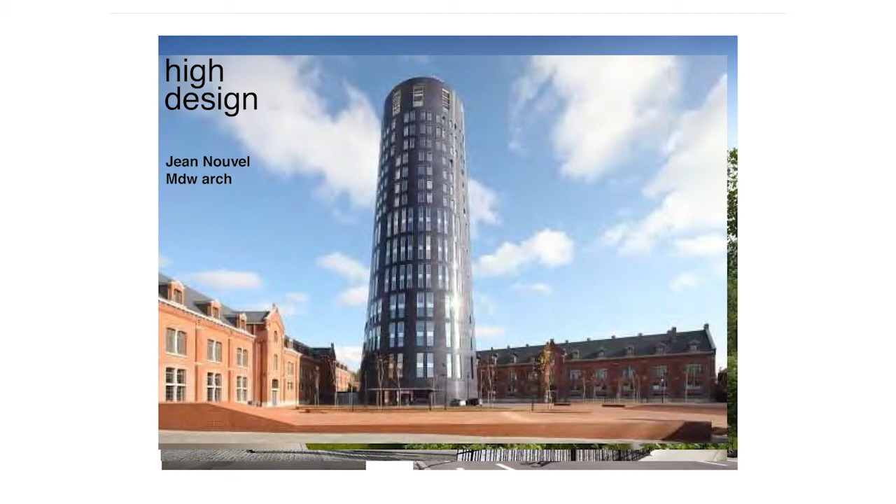Yeah, this is Jean Nouvel, for example. He finished police headquarters in the south of Belgium. It's a passive house. You don't know it's passive house, but what's funny is that Jean Nouvel before and after passive house stays Jean Nouvel, of course. But the thing is, you cannot say to Jean Nouvel, well, Jean, you know, your connection detail should be, you say, don't worry, your design stays, don't worry. Maybe it's not that clever, so you can have more insulation. Okay, so it's not that bad.

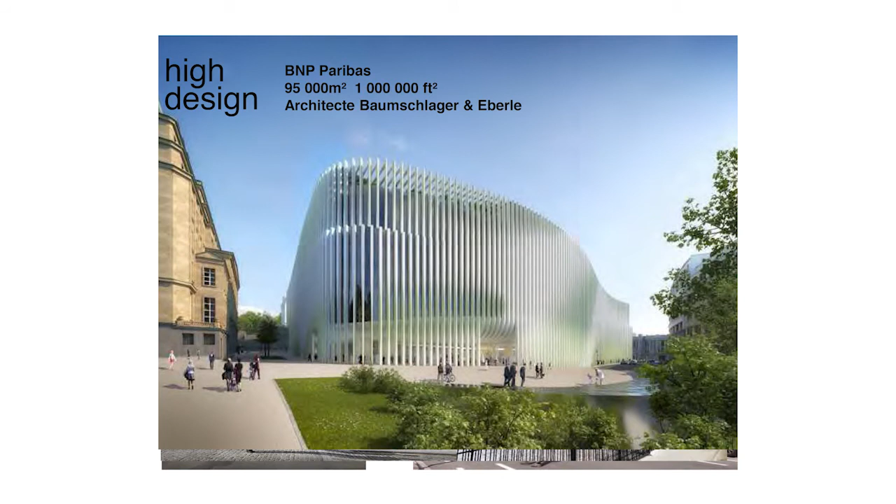And this is one of the last main competitions, won by Baumschlager Eberle. That's also our parliament. Big renovation started by another architect. This is Baumschlager Eberle from Austria. They won an enormous big one for BNP Paribas, a big bank. It's 1 million square feet, completely funky design, but it's all passive house.

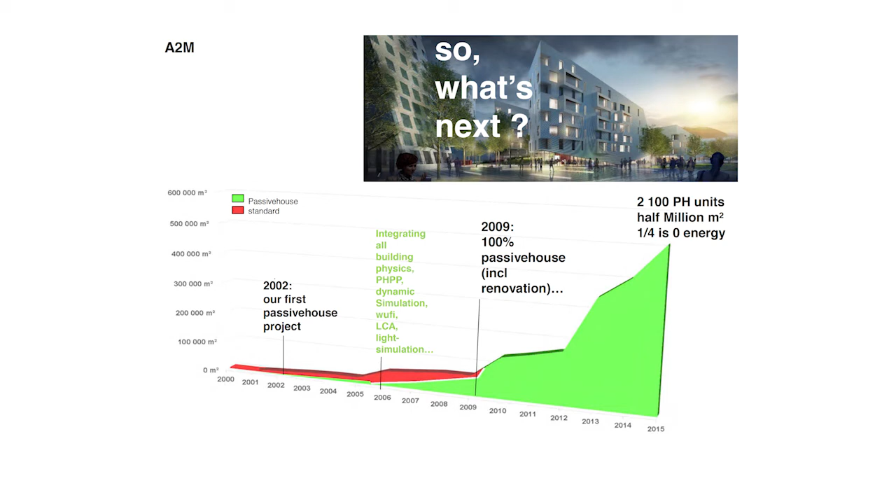So now I'm going to end with these 2-3 pieces of information. So after doing only passive house, normally, of course, we have integrated all the tools, so we don't outsource that. It's all part of our daily bread, I would say. Also solar ray calculation that we can measure on site and whatever.

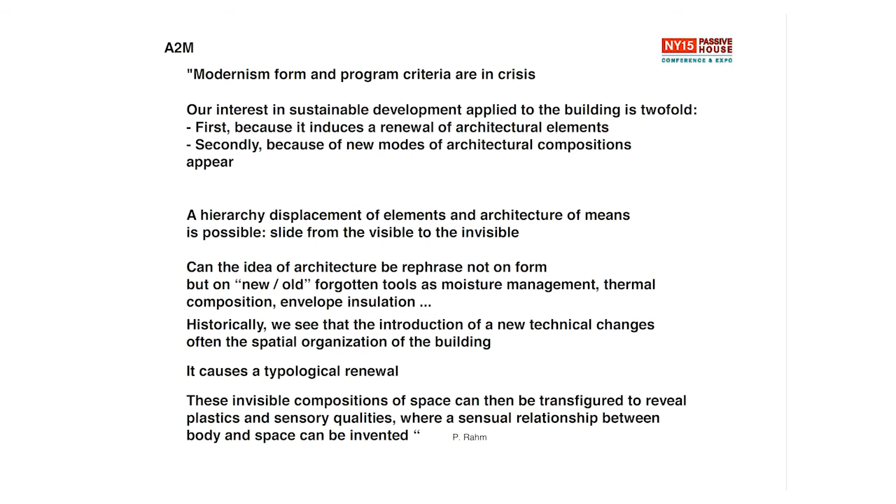It's for architects. So now, if you excuse me, I'm going to talk for architects just a minute. There's a kind of crisis in architecture because of the modernism criteria we had for forms or program and so on. People are wondering now why do such a design or another design, and for what? So our interest in sustainability came years ago, just a bit before passive house, and it was double.

It's not only to be consistent, of course, that's the minimum, but also we discovered little by little that maybe we have an occasion as architects, because we work on the envelope, on the form, what is visible, not the invisible. Maybe we can have there a renewal of architectural elements. So the question was, is it possible to reverse the process? Instead of making a building and making it passive house, which is okay, can we reverse and refeed architecture and maybe bring new ways of doing buildings?

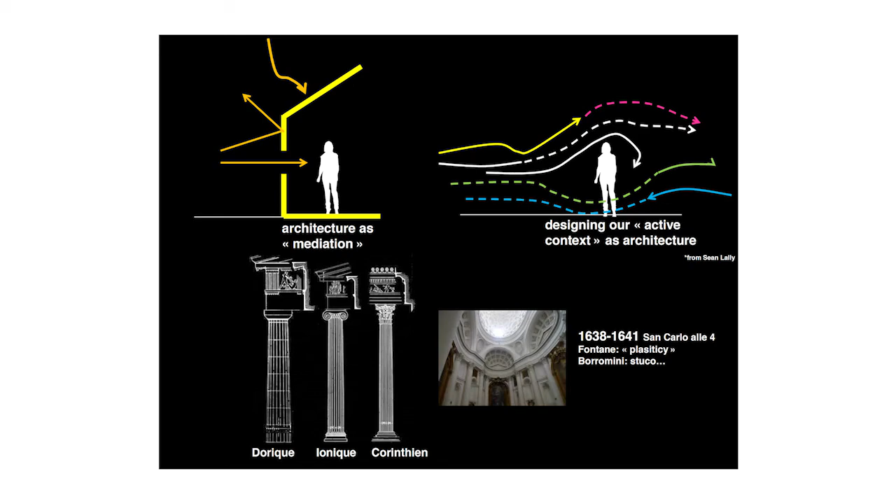And also, if you calculate the behavior of the wind, the air, airflows and so on, that can maybe redesign your architecture. So we took some references. There are not many people who work on that. It's very new. There's one here, Sean Lally, and they're just doing research. They don't build anything. But he's right when he said that architects and engineers just work on the envelope, as we did 2,000 years ago, or Borromini 300 years ago.

But why can't we use other elements as composition elements, like heat, water transformation, vapor, whatever? These could be new elements, not classical order or modernism order. As he said, and it's very bad for us, but he's also an architect: when you do architecture, you just do a stacked duck. So you put all your program, and at the end you have a building. Okay, nice. Sometimes it's nice.

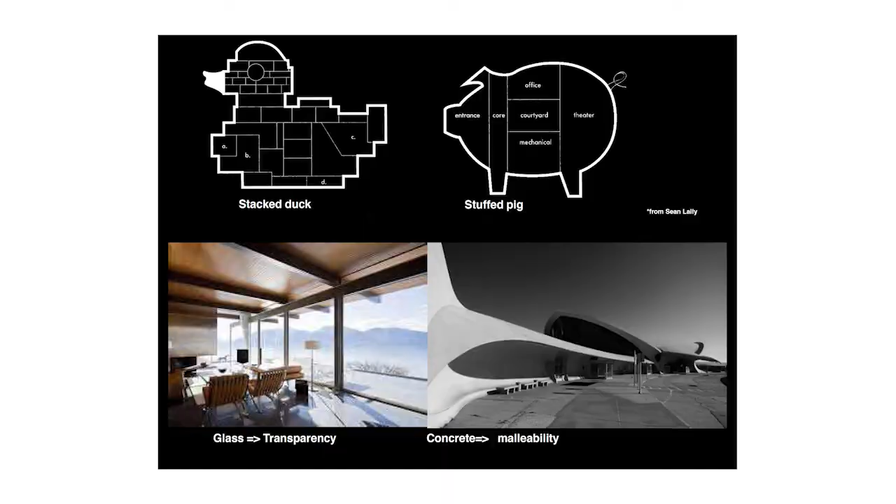Or you do it all the other way. You make a cool design and you try to put inside all the program. And most of the time, it looks like cool designs. But why can't we use all the heat transfer, everything we learned from passive house, all the building physics? Could we refeed architecture? A bit like concrete, which after years helped generate new design, like you have here with Saarinen. So another is Philippe Rahm.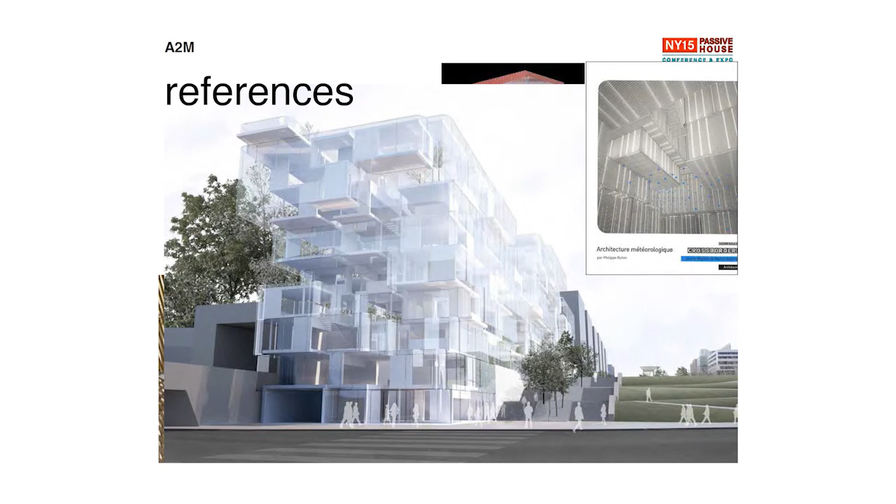You don't see it. It's been conceived only by the heat exchange coming in central zones and coming back to all the apartments. It fulfills passive house at the end, of course. But it really helps. So what we discovered is Grasshopper, linked to Rhino. Rhino is like SketchUp, whatever. But what is nice is we have a free plugin, Grasshopper.

The guy who invented it said you can make new ones also, but it has to be free and it has to have the name of an animal, okay? So we have a lot of crazy names now. This one is used now by architects or engineers to make meshing and whatever, just for the design, which is already okay. But you can also link them to external calculators like Ecotect or IES, for example. So we started using that only at the end of last year.

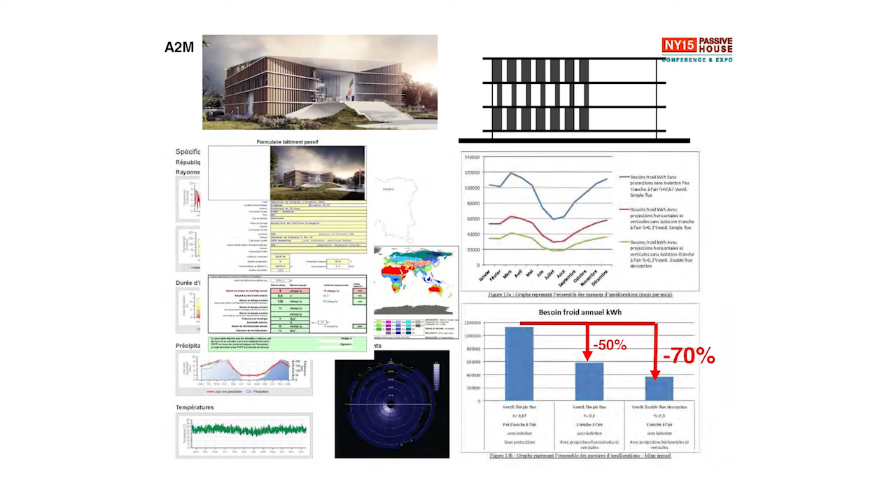For example, for the Belgian embassy, because we do passive house, so it's airtight, a bit of insulation, we reduced the cooling demand and the dehumidification by 70%. So we still need cooling, of course, but it's only 30%, which is nice. One of the concepts was those sun blinds. They are fixed, of course. In Kinshasa, nothing works, no techniques, no machines, so it has to be basic.

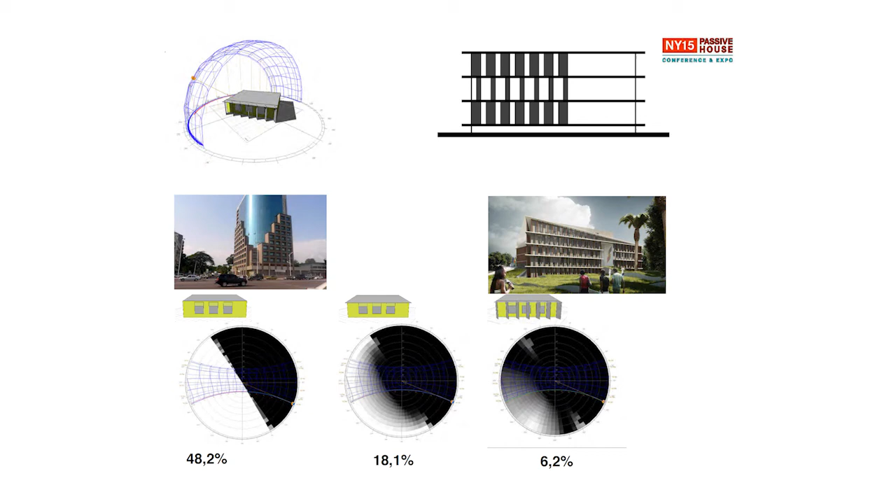So we calculated in PHPP, and then we started playing: how can we have these sun blinds, which orientation? We wanted every floor to be different, but how many simulations are we going to do? One, two, three maximum, it's a hell of a lot of work. So of course, with the sun blinds, from 50% we reduced to 6% external radiation.

So what we did, we put it in the Grasshopper here, the building with the climate data and so on, and we start playing and we put just meta rules. It's algorithm that you drag and drop, but instead of algorithm based on static or forms, we can put some algorithm links to heat exchange or small formulas like that. It's very easy to work.

And that, we ask him to change all the sun blinds every 1 degree and then launch a new Ecotect, so a new ray calculation. And so he launched alone with our rules and meta rules. Another is every floor is different, and try and see, give me 200 simulations.

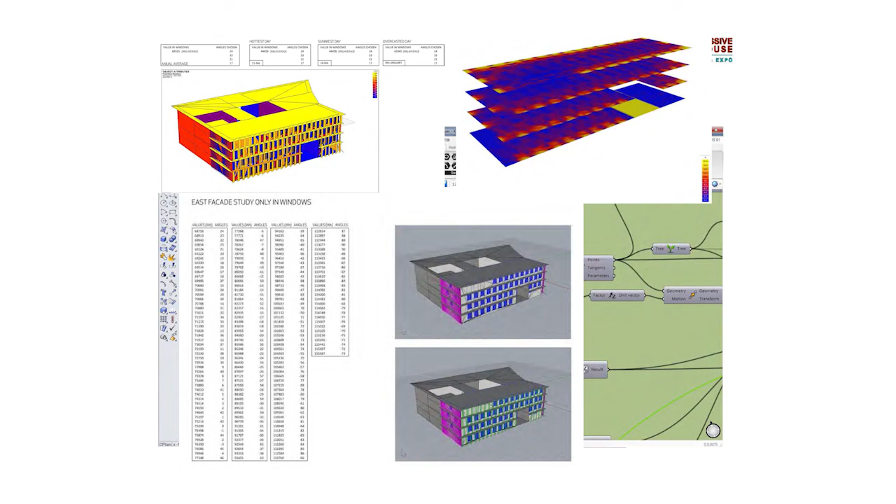And we will see. Few hours after, he came back automatically with a lot of new, we have here the solar radiation, and we had to be below a certain quantity to fulfill the maximum 120 kilowatt hours per square meter, all included. And regarding that, this is how we built our different frames. So that was helped thanks to the parametric design.

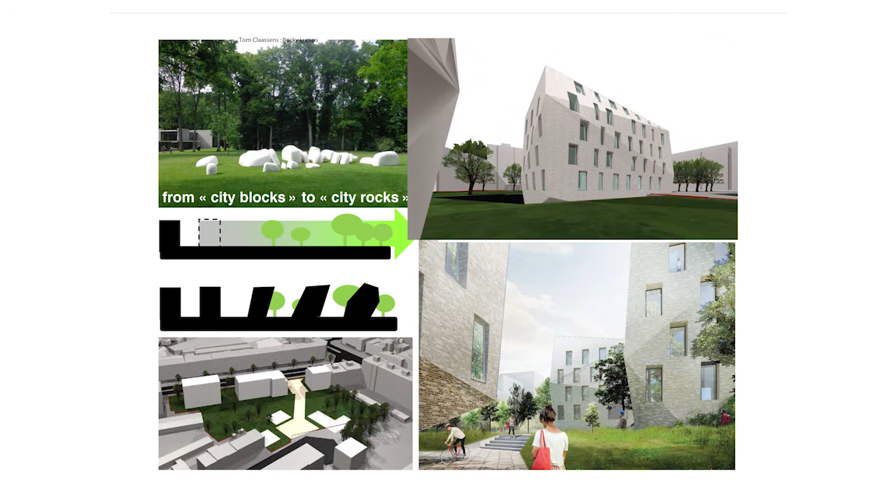Another we did is also for this, it's another competition, we still wait the result, my God, it should be beginning of the year. So it's block, hundreds of housing, along the street and inside the park. We call it city block to city rock. So we make like funky forms, okay, of housing.

All the same concrete core, but it's only in the thickness of the insulation that we make all the change, completely change. But the thing is, when you do that, you do this form, there is a formula we use to have variable thickness. So in Europe, you have a lot of European norms, which is cool. It's that formula. But you think that when I'm going to calculate it, I have an average U value of 0.1, 0.12, that after I change it a bit, we're going to recalculate it. Are you out of your mind?

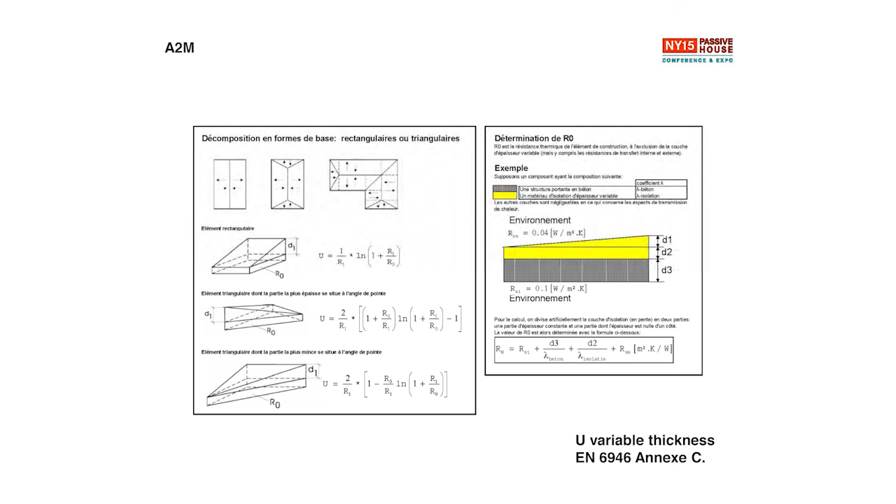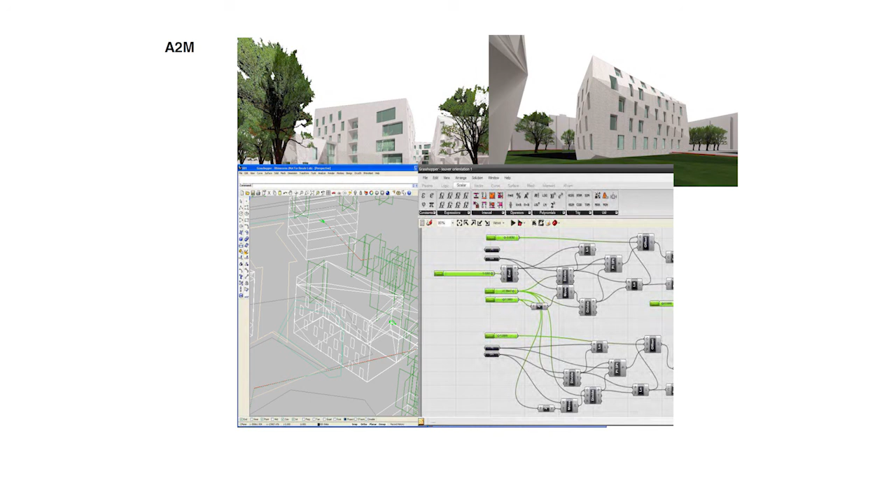It's crazy work. Then what we did, we copied this formula, we put it in the Grasshopper, and we start playing. And we put one algorithm, stop the movement when we have more than average 0.12 on variable thickness. So this helped. On the other hand, we created also on the passive platform a connect tool, and if you click here, then you have a calculation for one single slope U value calculation, but that's for just a roof, not with those crazy forms. So this is a way how we use now parametric design to try to refeed.

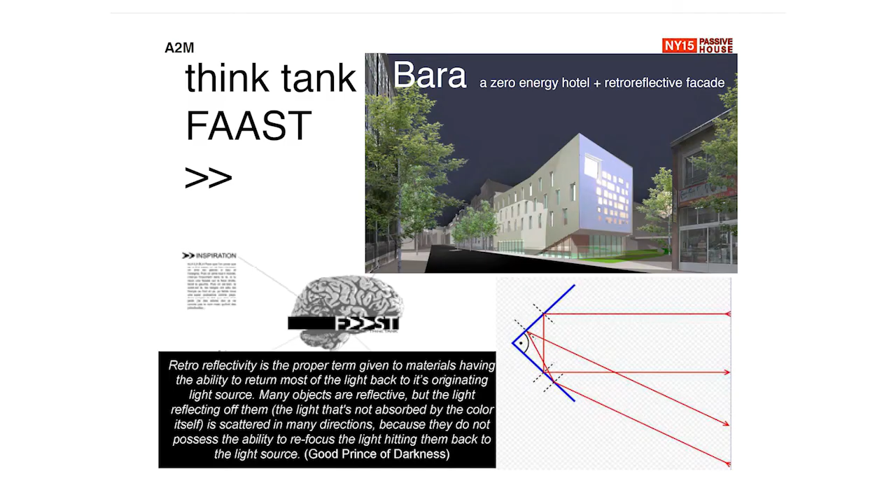And to end, we created now a kind of think tank where, together with Michel Penneman, a contractor and a developer, we integrate now whatever kind of funny design. So here's a new hotel we do now, 170 rooms, zero energy. It's a bit more than passive house, okay? But we use there a film.

It's a retro-reflective film. The purpose is from everywhere you're going to look at, you're going to have a different color by reflection. Retro-reflectivity gives you back the color you have from the source. We don't know if it's going to work. Maybe it's not going to work. But the thing is, try to push farther. Always stay borderline.

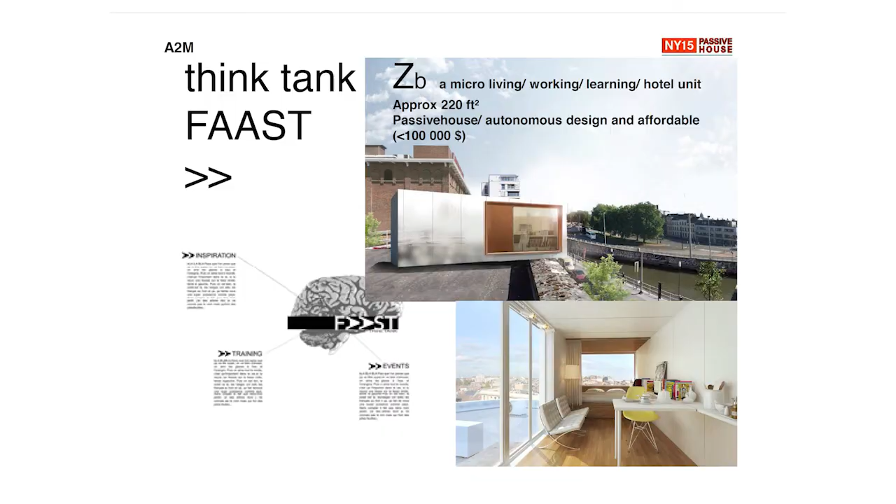Then the last one, we showed it also when we went, I don't know if Emma Jones is here, in Cooper Union. We invest ourselves on small, micro, affordable units. It can be housing, can be hotel, working, whatever. They're very tiny, it's 220 square feet. But can we fulfill passive house? And not only, can it be 100% autonomous with a cost less than $100,000? It is now, yet. And also design.

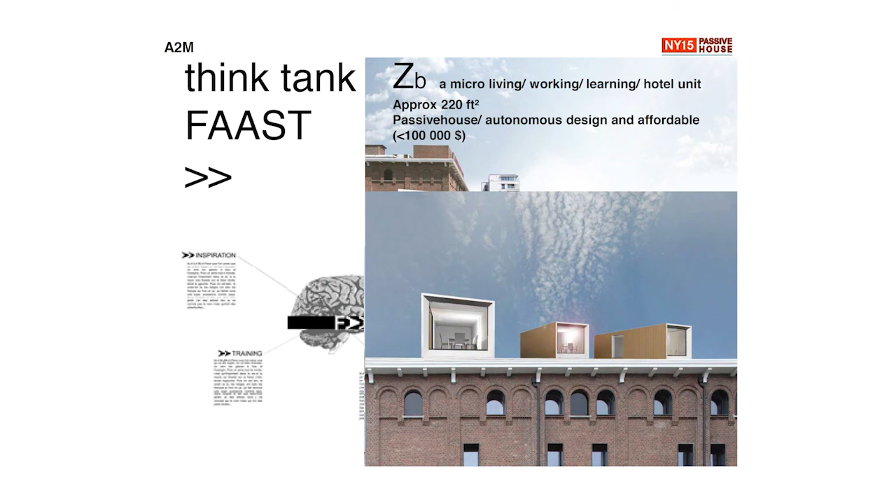So that's the inside. So the first one is finishing now, is going to Florence in Italy, beginning of next week. And at the end of the year, we're going to bring one here in the Meatpacking. And also to make a monitoring here and to make a monitoring in our country and to see how it does.

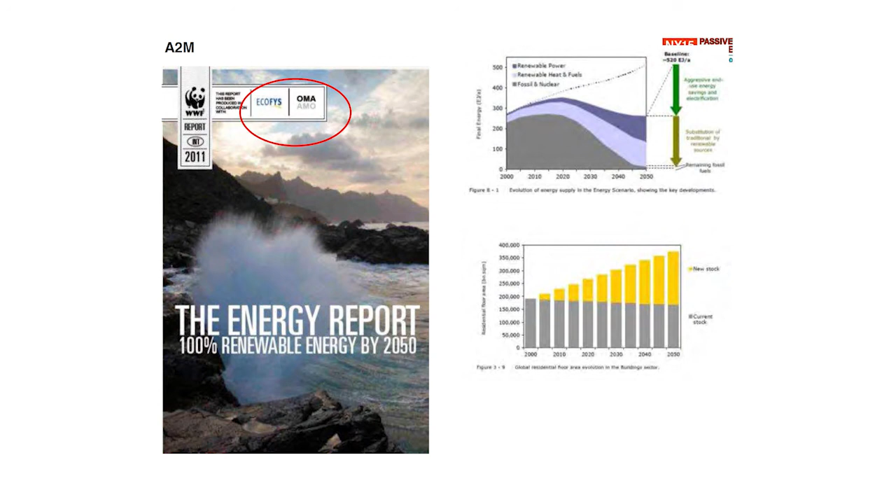And to end, I come back to Rem Koolhaas, OMA, star of sky-is-the-limit for architects. He made a report years ago when he said, look, if you want to be energy-free in 2050, try that the new build is close to zero energy, and renovate as far as you can the existing stock. But new stock should be close to zero energy. And he said, by close to zero energy, I mean the German passive house. So this is how I start with the students.